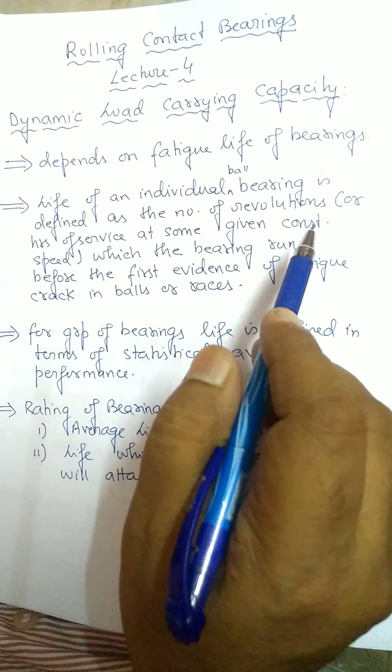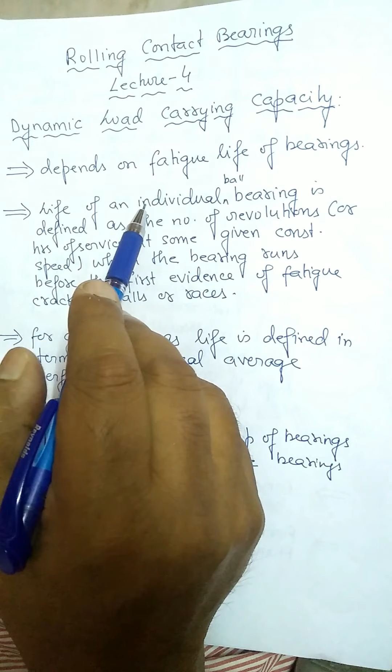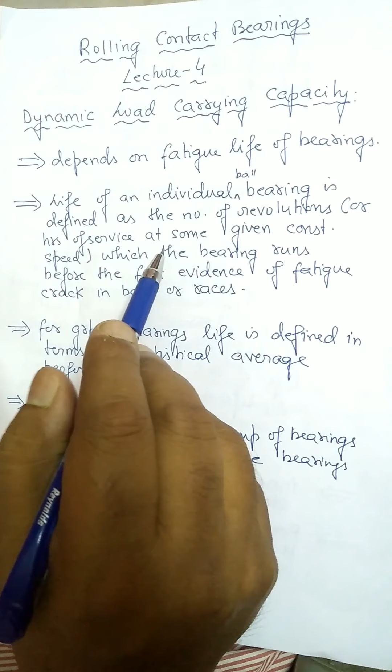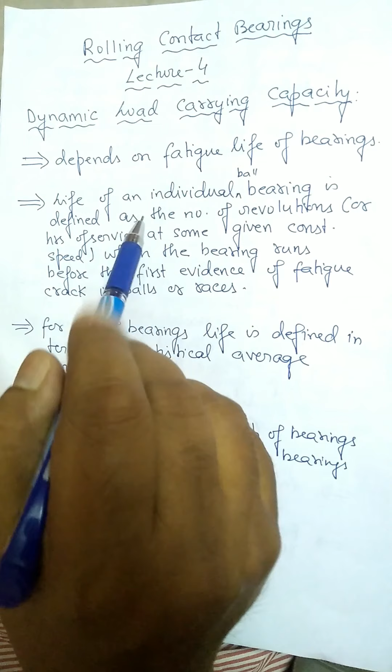In continuation of rolling contact bearings, we are now into lecture 4. Let us recollect what we have done so far. In the last class, we discussed the static load carrying capacity of bearings, derived the Stribeck equations, and I gave you an assignment on that, along with some notes on dynamic load carrying capacity. But today, before we proceed, you have to understand what we mean by dynamic load carrying capacity, because certain equations need to be derived based on that.

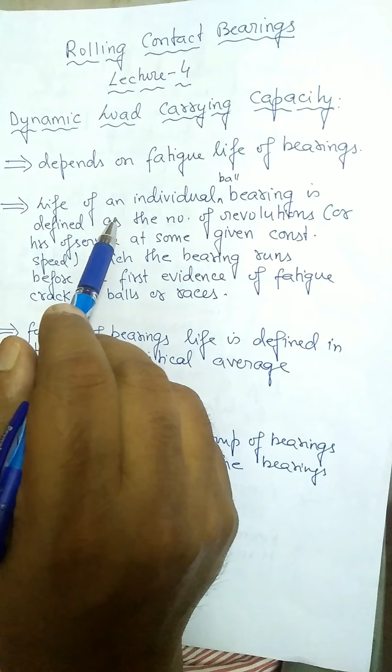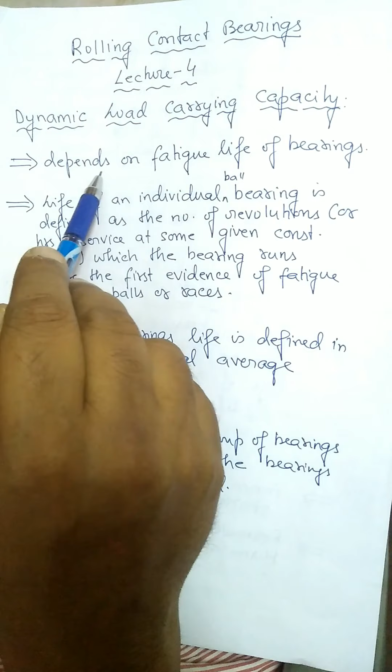Now, any industrial product has its own life, so bearings have their own life until failure. Bearing life is determined by fatigue. Therefore, the life of a bearing depends on the fatigue life, so dynamic load carrying capacity depends on the fatigue life of bearings.

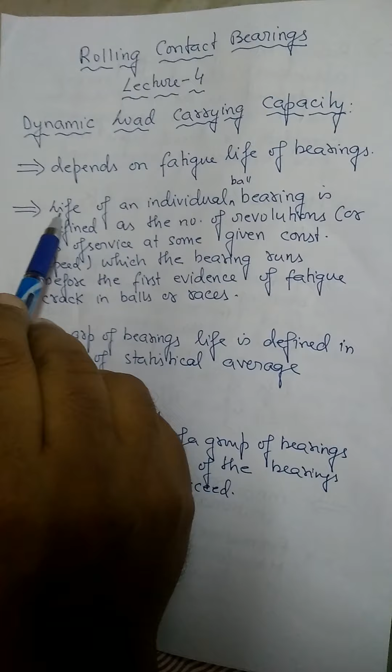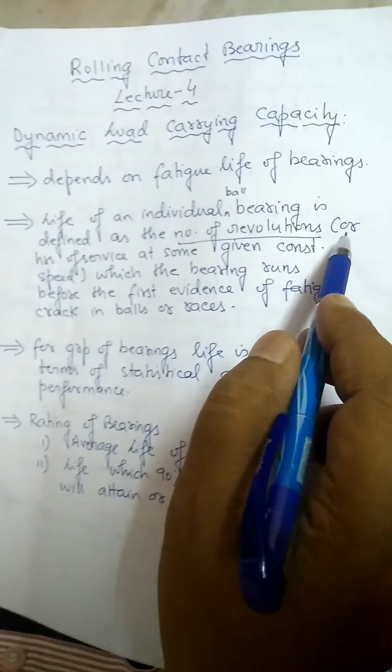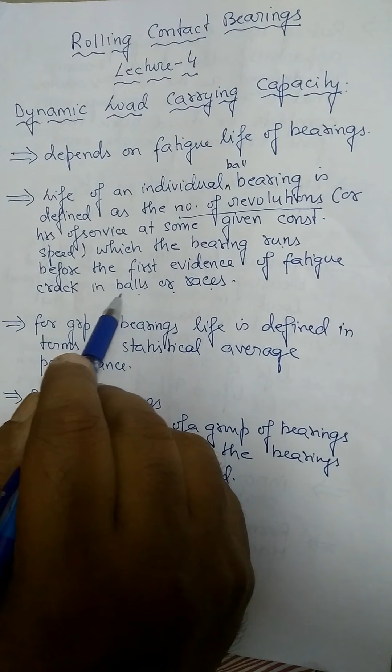When I talk about bearings, it can be an individual ball bearing or a group of bearings. If it is an individual ball bearing, the life is defined as the number of revolutions or hours of service at some given constant speed which the bearing runs before the first evidence of fatigue crack in balls or races. If any fatigue failure occurs, it may happen at the surface of the balls, the inner race, or the outer race. This is quite evident that the fatigue has started and the life of the bearing is being shortened.

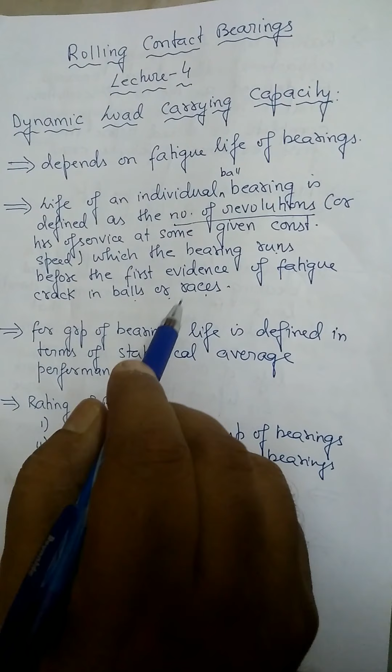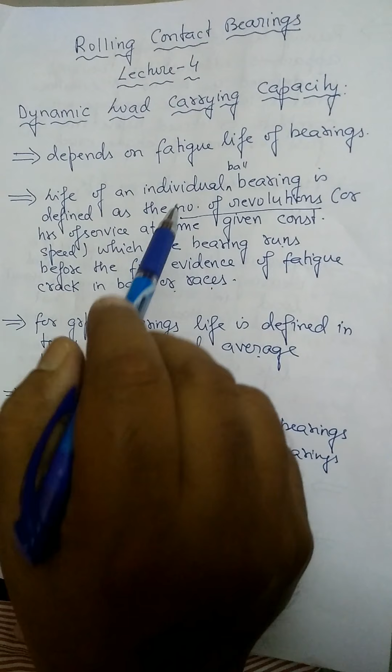Now if we consider a group of bearings, life is defined in terms of statistical average performance. Why is this so? Because it is very difficult to determine the life of an individual ball bearing, so we take the help of a group of bearings, and life is defined in terms of statistical average performance.

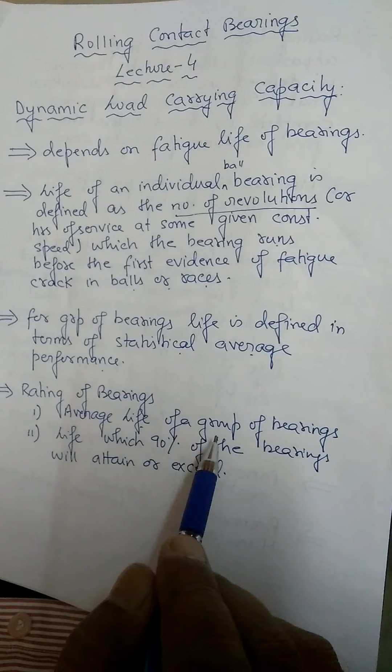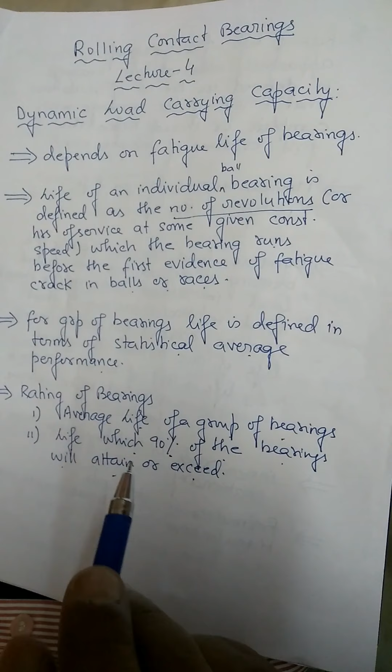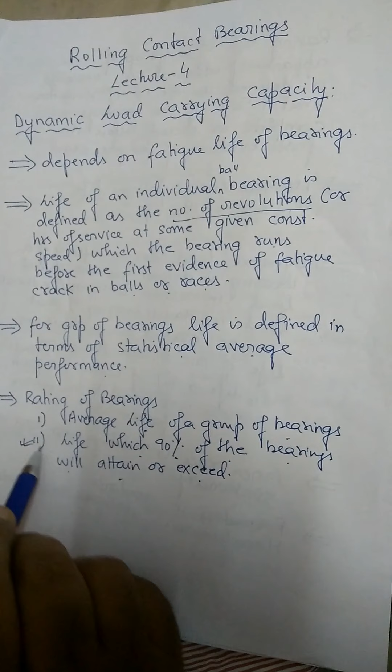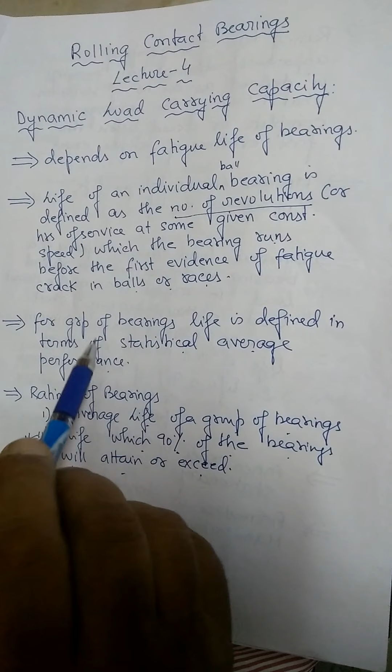Now this rating of bearings depends upon two factors: the average life of a group of bearings, or the life which 90% of the bearings will attain or exceed. But in industry, this second factor, life which 90% of bearings will attain or exceed, is very common. So for rating of bearings, we go for number 2, that is 90%, when the bearing life will attain or exceed before the fatigue failure is evident on the surface of the balls or races.

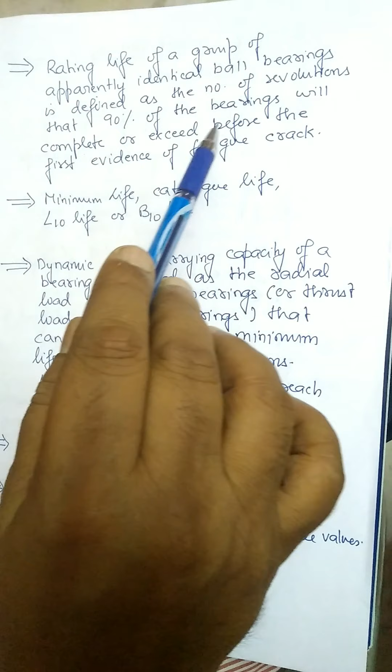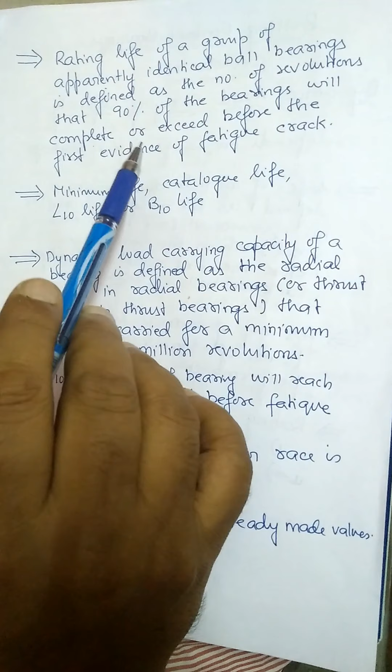So the rating life of a group of apparently identical ball bearings can be defined as the number of revolutions that 90% of the bearings will complete or exceed before the first evidence of fatigue crack. Now this minimum life or fatigue life is called, in different books and industries, minimum life, catalog life, L suffix 10 life, or B10 life. In our syllabus, this is given, so we will follow L10 life to determine the rating life for ball bearings.

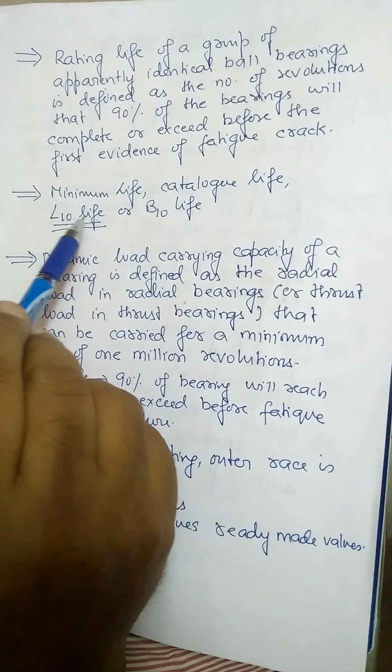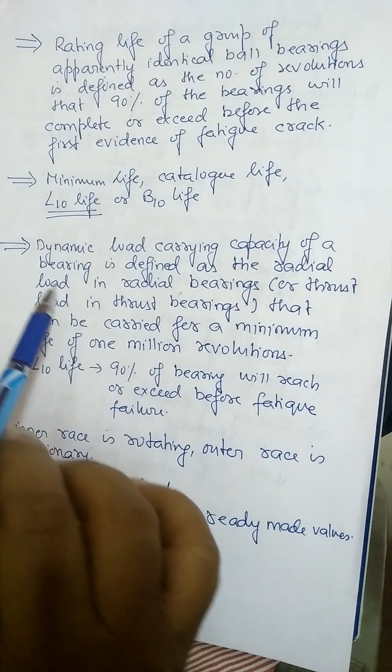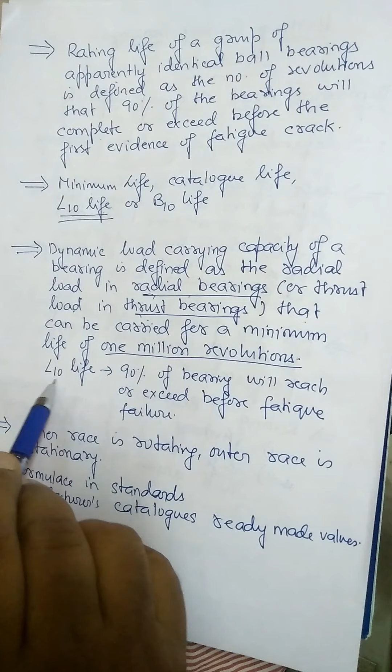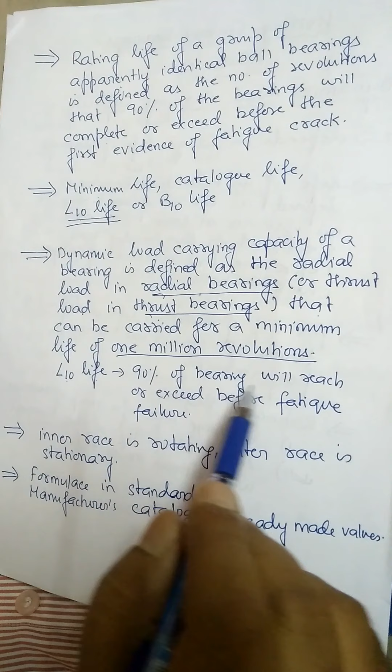So understanding this, for individual ball bearings or groups of ball bearings, we can now state that the dynamic load carrying capacity of a bearing is defined as the radial load in radial bearings, or thrust load in thrust bearings, that can be carried for a minimum life of 1 million revolutions. This is another important thing. So L10 life, which we will be following throughout the text, indicates that 90% of bearings will reach or exceed before fatigue failure occurs.

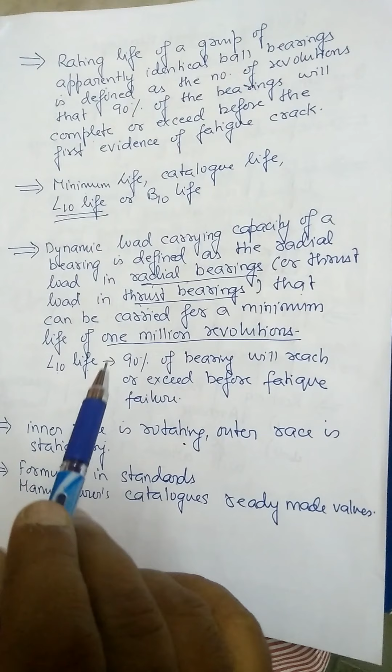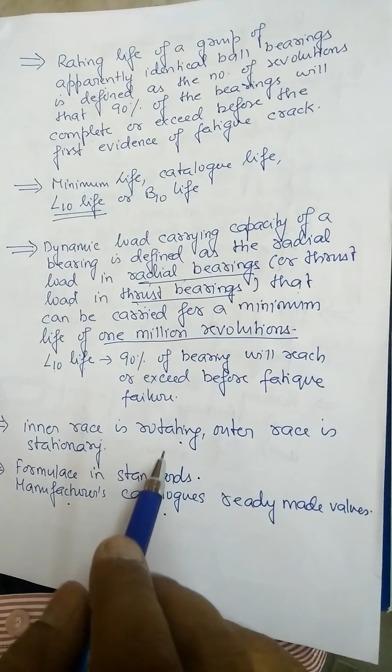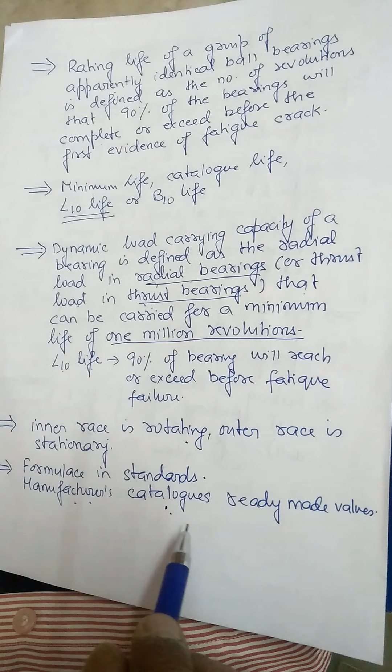So here we assume that the inner race is rotating and the outer race is stationary. Normally this is an assumption that has been followed. The formula for calculation of the rating life of bearings for different types of bearings are given in standards, but there is also a manufacturer catalog, devised by manufacturers, which contains ready-made values of the fatigue life for different types of bearings. So if you go to a manufacturer catalog, any manufacturer will have this kind of catalog containing ready-made values of the life of bearings.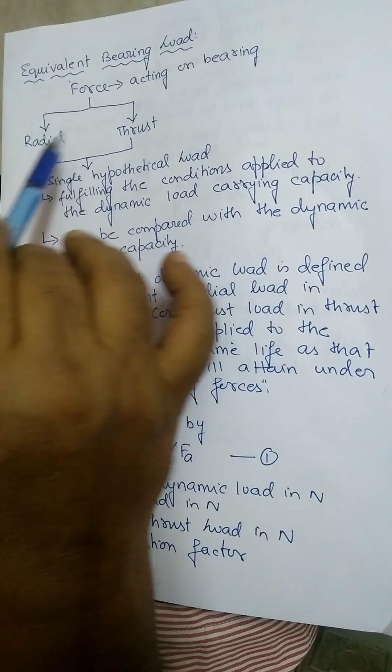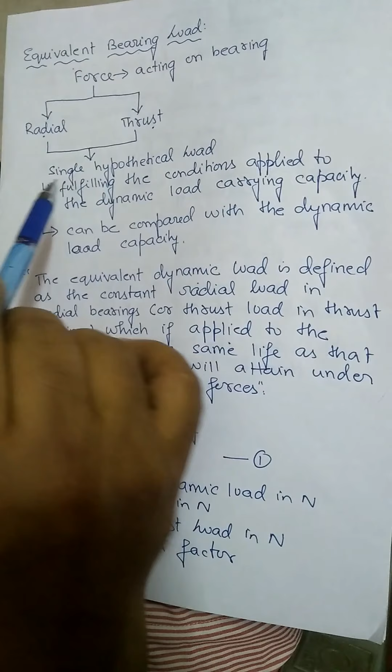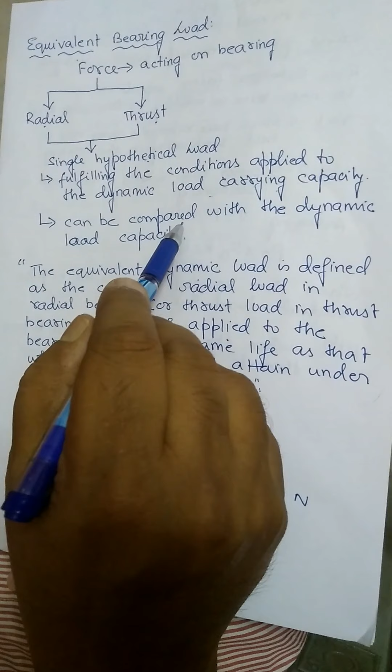Now, having understood the meaning of dynamic load carrying capacity of bearing, we move into the equivalent bearing load. Any force acting on a bearing has two components: one is the radial component and another is the thrust component. If we want to combine these two components into one, we get a single hypothetical load. This hypothetical load, or the equivalent load, must fulfill the conditions applied to the dynamic load carrying capacity, or it can be compared with the dynamic load carrying capacity of the bearing.

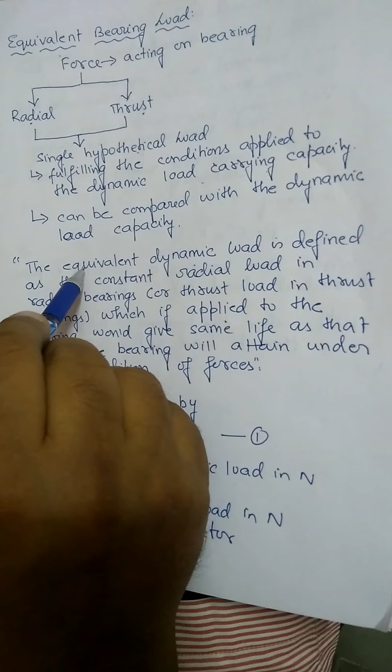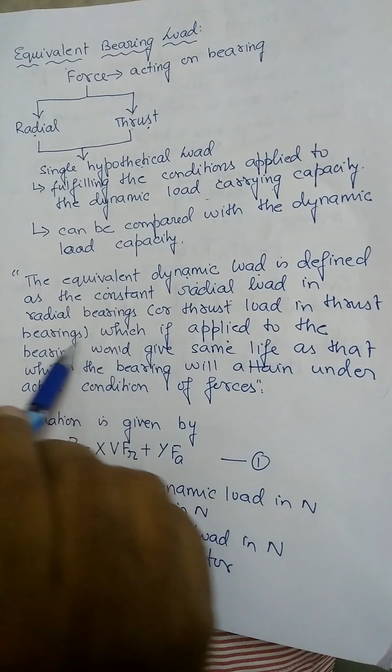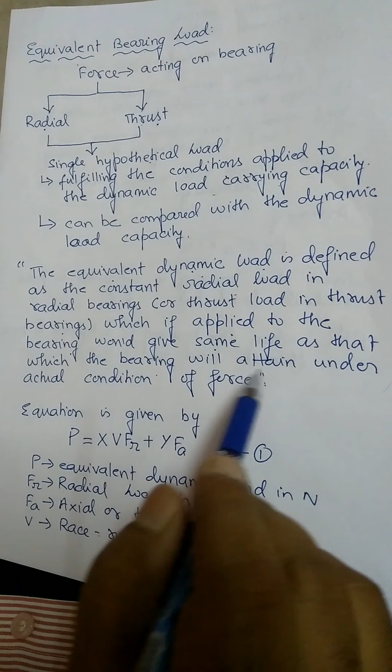So from this we can define a new term, the equivalent load. The word equivalent has come from hypothetical, that is, combining these two load factors, the force components, into one. So equivalent dynamic load is defined as the constant radial load in radial bearings or thrust load in thrust bearings, which if applied to the bearing would give the same life as that which the bearing would attain under actual conditions of forces. This is the definition of equivalent dynamic load.

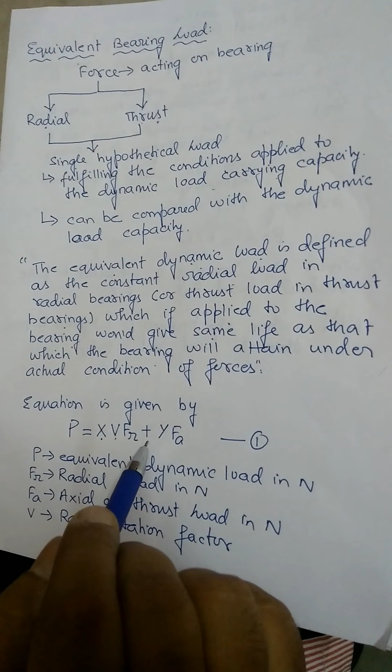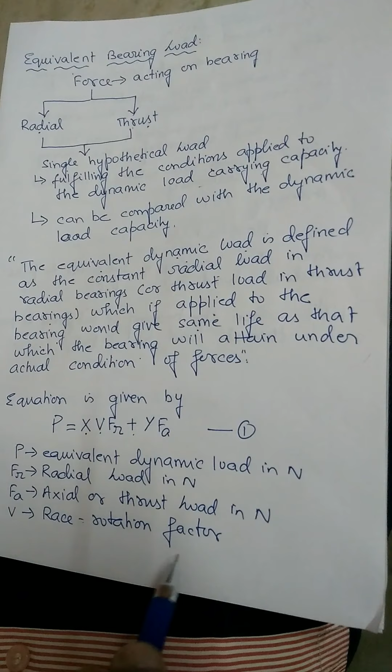Now the equation for the equivalent dynamic load is given by P equals X into V into Fr plus Y into Fa, equation 1, where P stands for equivalent dynamic load in Newton, Fr is the radial load in Newton, Fa is the axial or thrust load in Newton, and V is a factor known as the race rotation factor.

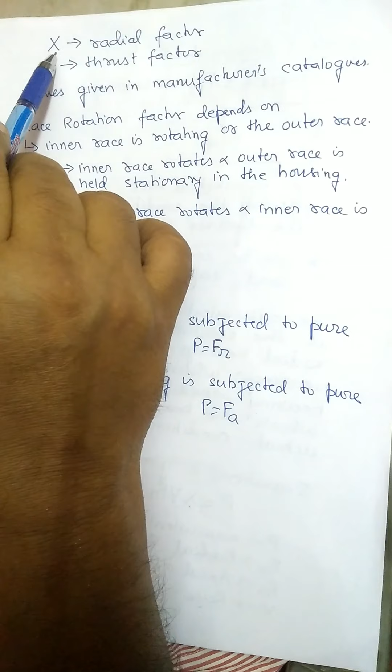Now, the capital X in the equation I've shown you before is known as the radial factor, and capital Y is known as the thrust factor. The values for X and Y are also given in the manufacturer catalog.

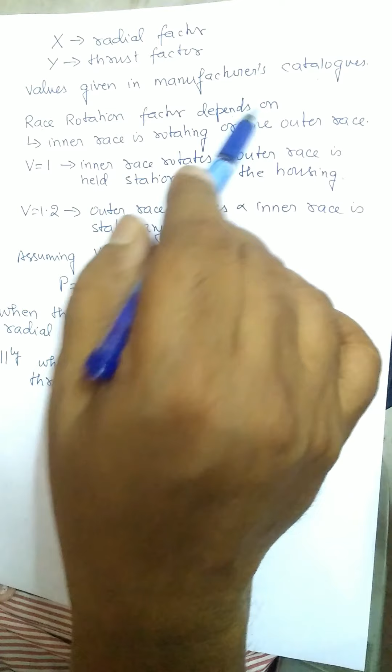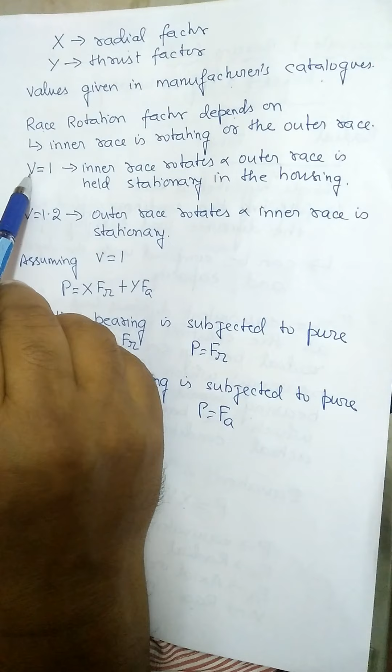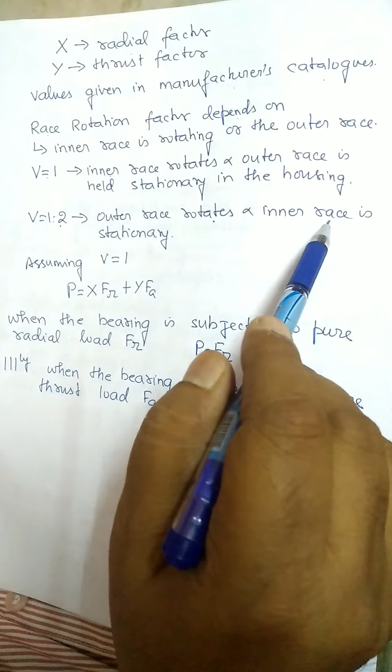Now this race rotation factor, capital V, depends on whether the inner race is rotating or the outer race is rotating. If V is equal to 1, it indicates that the inner race of the bearing rotates and the outer race is held stationary in the housing. If V is equal to 1.2, it means the outer race of the bearing is rotating and the inner race is stationary. Generally, we assume that V is equal to 1.

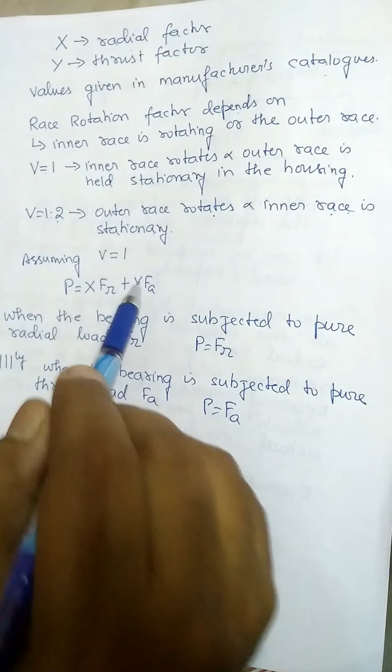So in that case, equation 1 which I've shown earlier becomes capital P is equal to X into Fr plus Y into Fa. This is for radial load and this is for thrust load.

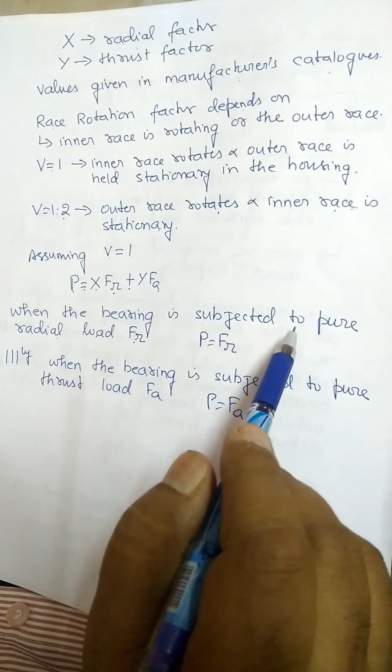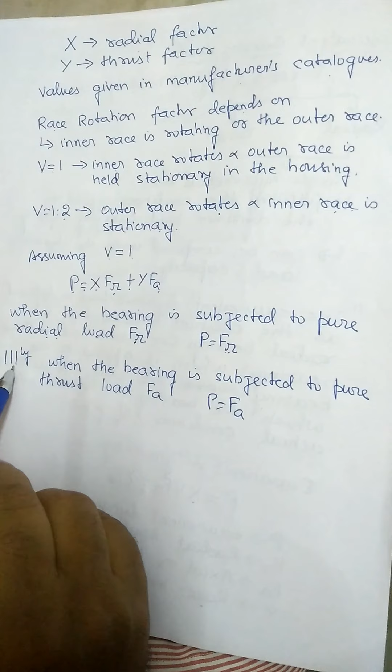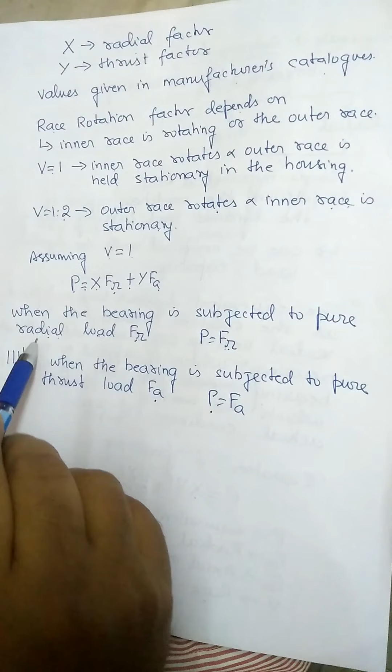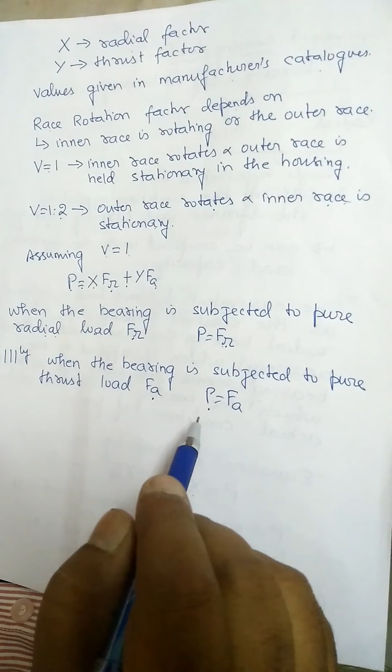Now, when the bearing is subjected to pure radial load, that is Fr, capital P becomes equal to Fr. Similarly, when the bearing is subjected to pure thrust load or axial load, Fa, capital P becomes equal to Fa. So in the problem, we have to see whether the bearing is subjected to pure radial load - in that case you take P equal to Fr - or whether it is subject to pure thrust load or axial load, in which case P becomes equal to Fa.

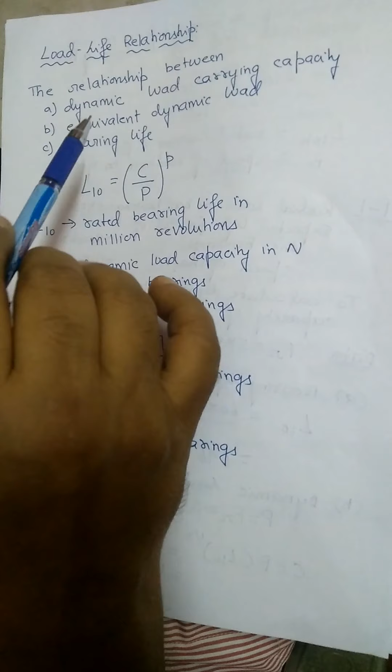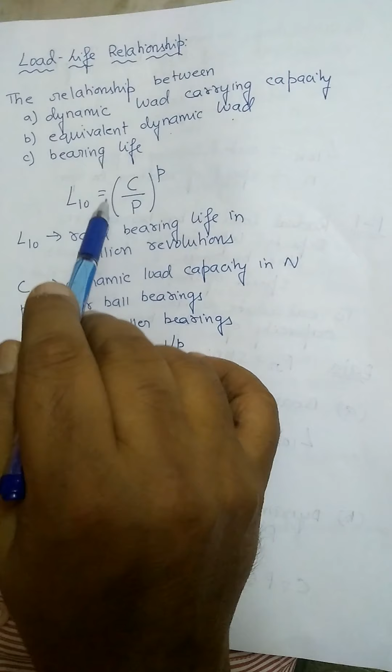We have seen the dynamic load carrying capacity and also the equivalent bearing load. Now if we want to find a relationship between the dynamic load carrying capacity, the equivalent dynamic load, and the bearing life all into one, we come to this equation: capital L10, the life of a bearing, is given by an empirical relation.

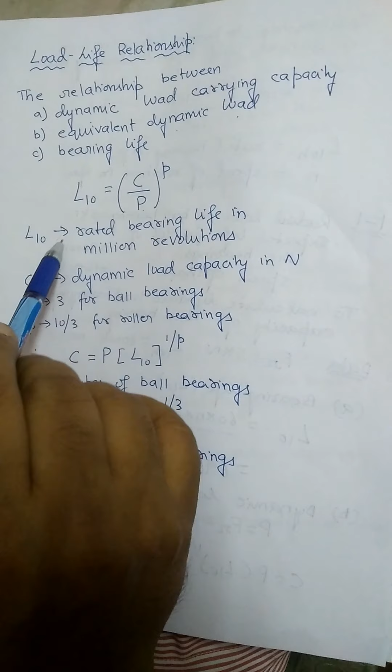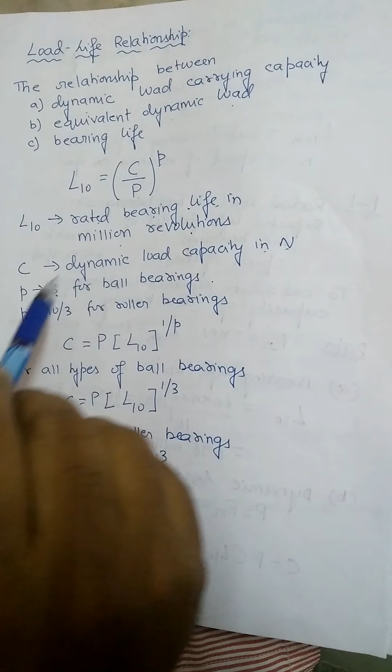So L10 is equal to capital C by capital P to the power small p, where L10 indicates rated bearing life in million revolutions, and capital C is dynamic load capacity in Newton. Now small p here is taken as 3 for ball bearings, and small p is taken as 10 by 3 for roller bearings. So there are different values of p for different types of bearings.

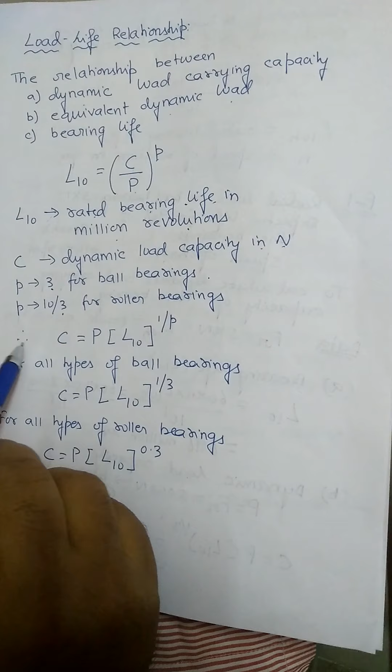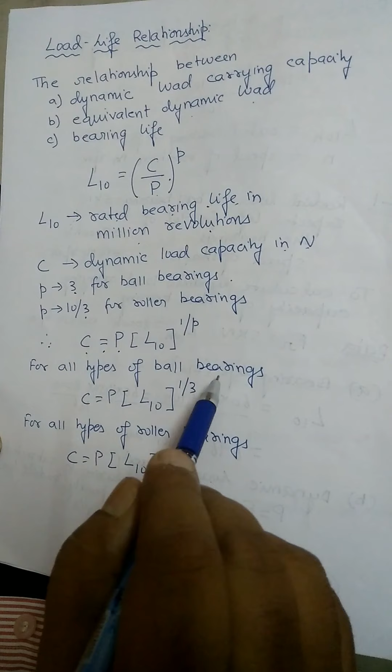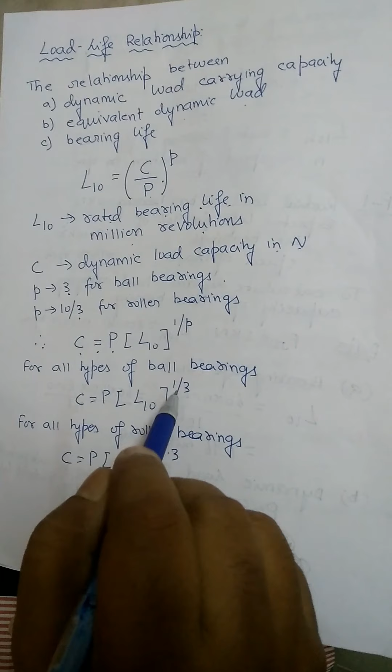So therefore, from this equation, if I am to calculate C, the dynamic load capacity in Newton: capital C is equal to capital P into L10 to the power 1 by small p. Now for all types of ball bearings, small p is equal to 3, so C is equal to capital P into L10 to the power 1 by 3, because the value of p is 3 for ball bearings.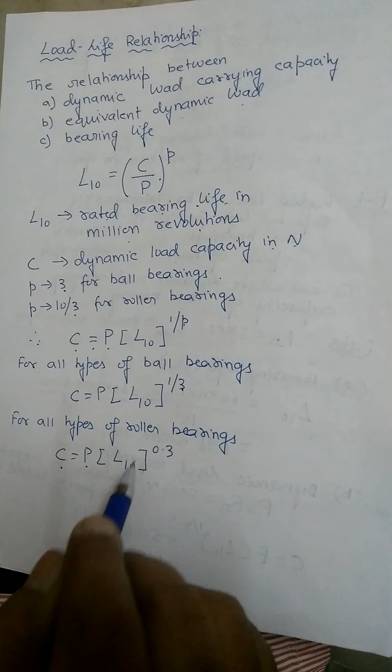Now if I consider roller bearings, for all types of roller bearings, small p is equal to 10 by 3. So capital C is equal to capital P into L10 to the power 0.3, because 1 by p becomes 3 by 10, and 3 by 10 gives equal to 0.3.

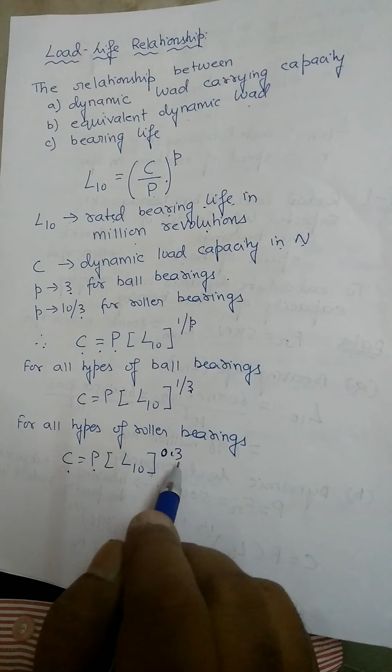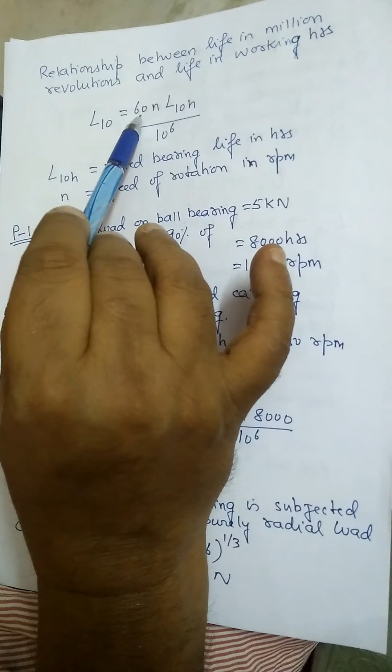Now, if we want to find the bearing life in million revolutions or life in working hours, there is a relationship given by capital L10 is equal to 60 into small n into L10 hours divided by 10 to the power 6, where L10 hours is known as rated bearing life in hours and small n is speed of rotation in RPM.

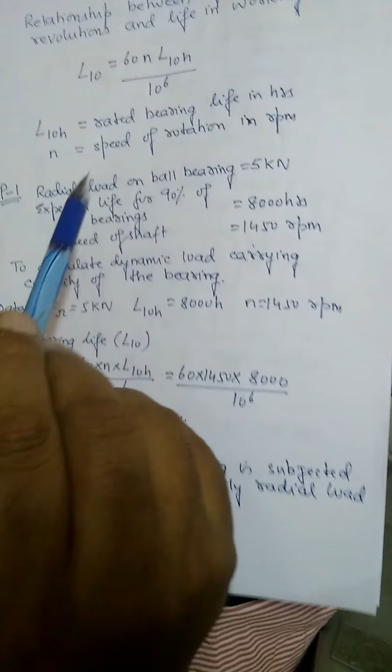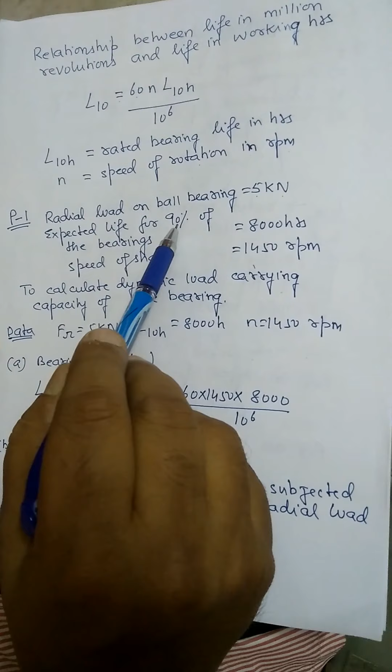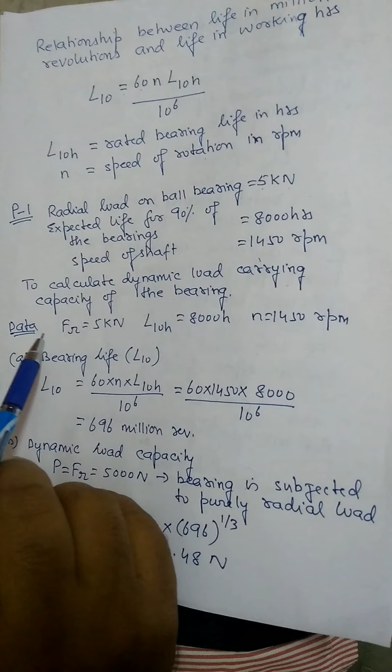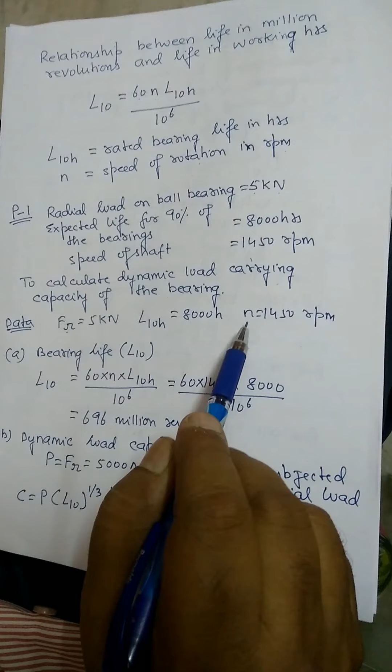Now, in order to explain this formula, I have taken a small problem. Let the radial load on a ball bearing be 5 kN. Expected life for 90% of bearings is 8,000 hours, and the speed of the shaft is 1450 rpm. We are going to calculate the dynamic load carrying capacity of the bearing. So we have to write the data first: radial load Fr is 5 kilonewton, L10 hours is 8000 hours, and small n, the speed of the shaft, is 1450 rpm.

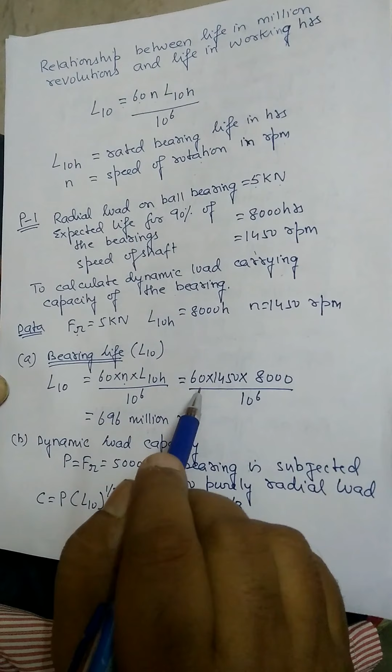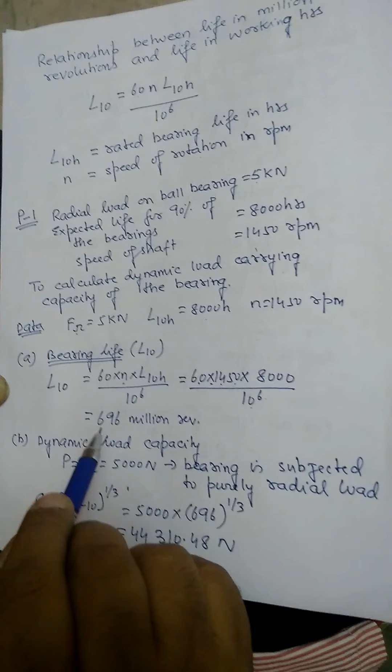So here, first we have to calculate the bearing life, that is most important, L10. From the above formula, L10 is 60 into n into L10 hours divided by 10 to the power 6. So 60 into 1450, n given as 1450, into L10 hours given as 8000, divided by 10 to the power 6, gives us 696 million revolutions.

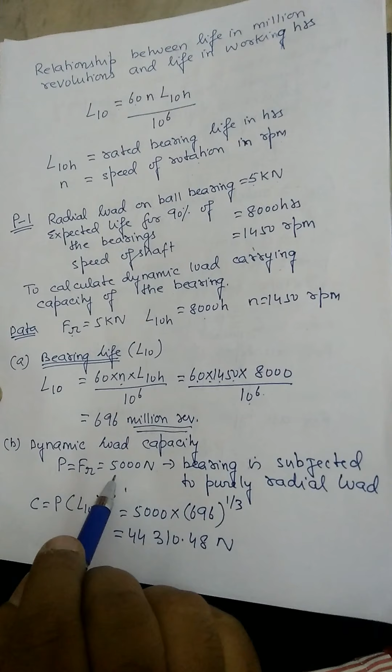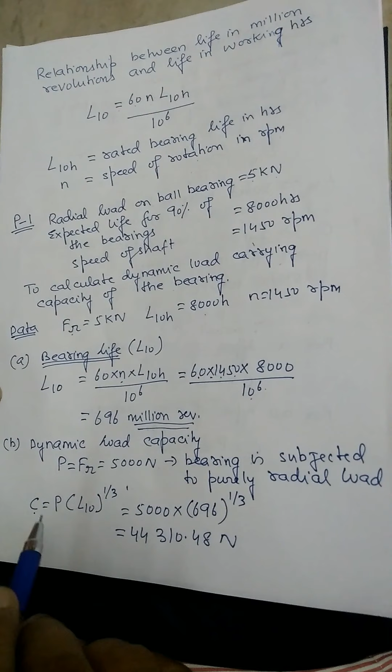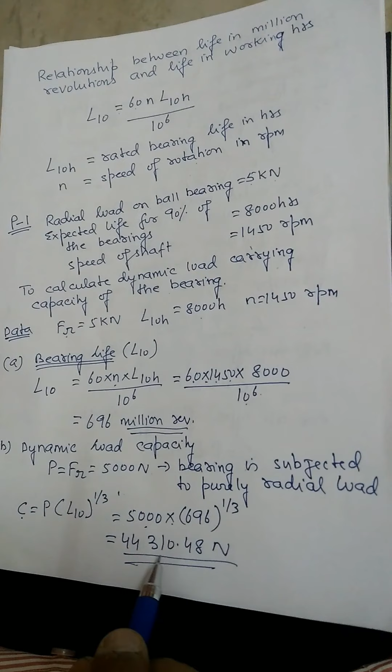So once we calculate L10, it becomes very easy to calculate dynamic load capacity. Dynamic load capacity, capital P, is equal to Fr, because the radial load is the only load acting on the bearing. So Fr is 5 kilonewton, that is 5000 Newton, and the bearing here is subject to pure radial load as I explained before. So capital C, which stands for dynamic load capacity, C is equal to P into L10 to the power 1 by 3. So P is 5000 into L10 we calculated, 696, to the power 1 by 3. That gives us 44,310.48 Newton. So the dynamic load capacity of the bearing is 44,310.48 Newton.